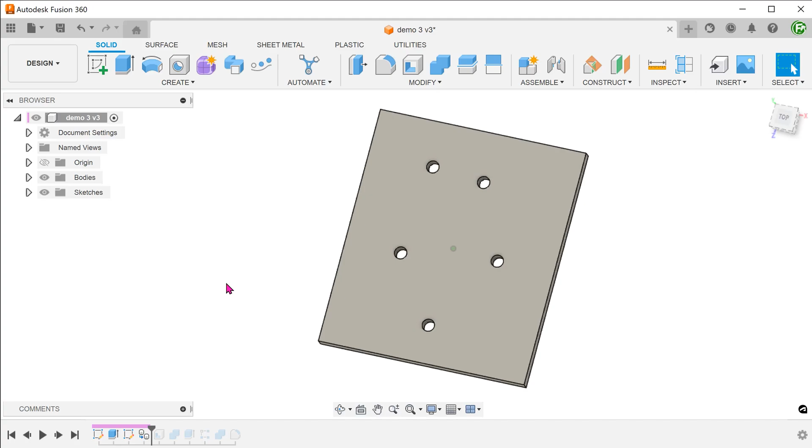We have a plate with a bunch of holes here. The objective is to reduce the amount of material used by cutting slots around the holes.

I think the easiest way would actually be to cut the slots before creating the holes. But I thought it would be an interesting exercise to start from the point where the holes have already been created.

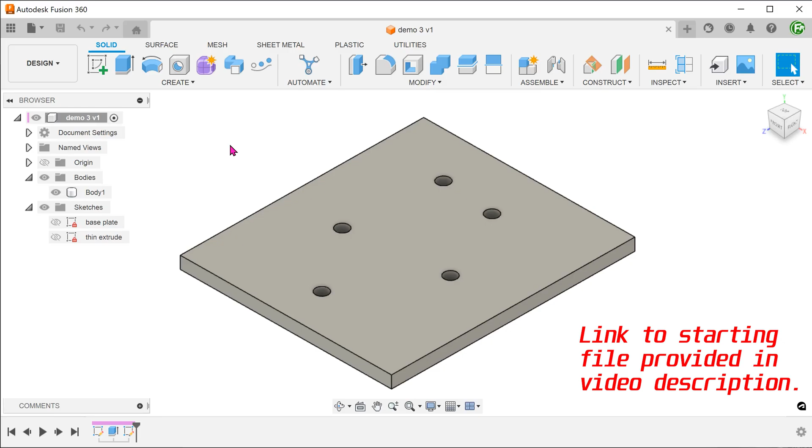First, we need to create a copy of the body. Go to the Bodies folder, select the body, and simply use Ctrl+C and Ctrl+V. Click OK to create a copy in the same place as the original. Rename the copy and hide it for the moment.

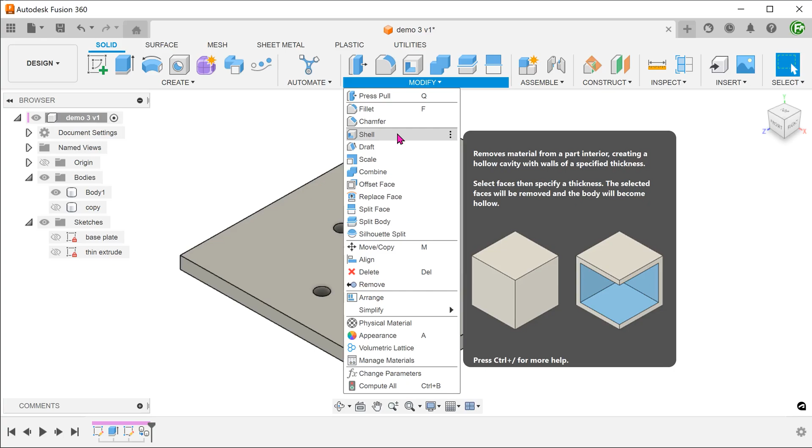We want to remove as much material as possible. Go to Modify, Shell. Select the top and bottom faces, and adjust the thickness. This creates a frame with rings around each hole. This is a minimum material condition.

From here, we want to add material back in. We need to create a body that fills the space between the rings and the frame. Bring back the copy.

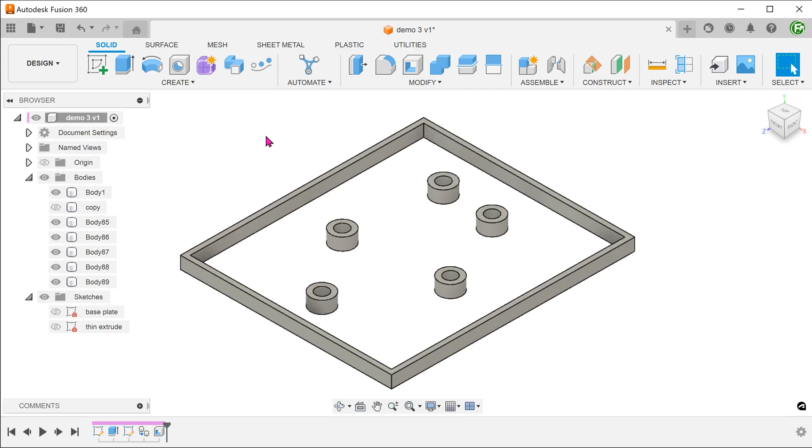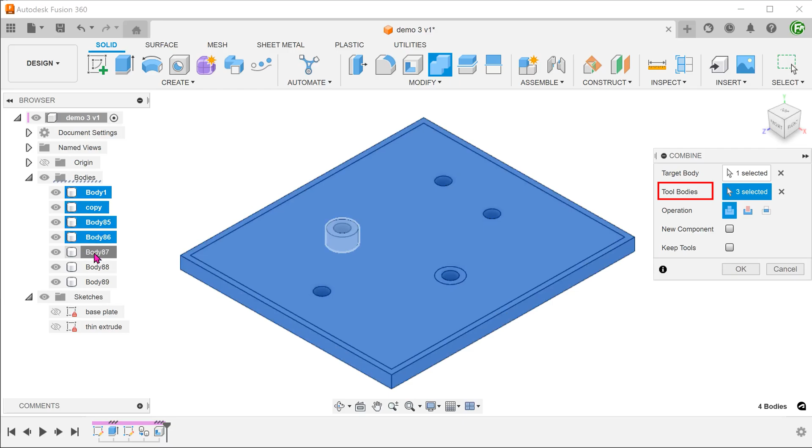Go to Modify, Combine. Select the copy as a target. For tool bodies, select all the other bodies. These bodies will be used to cut into the copy. Change operation to cut. We do want to retain the tool bodies, so check the Keep Tools option.

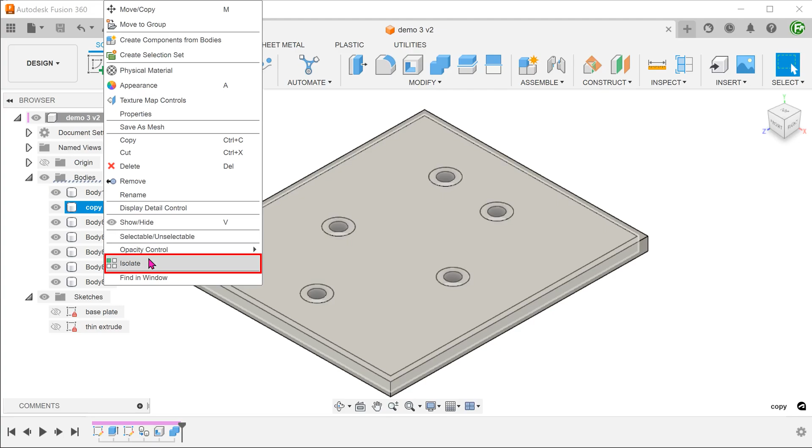Let's isolate the copy and create a sketch on this face.

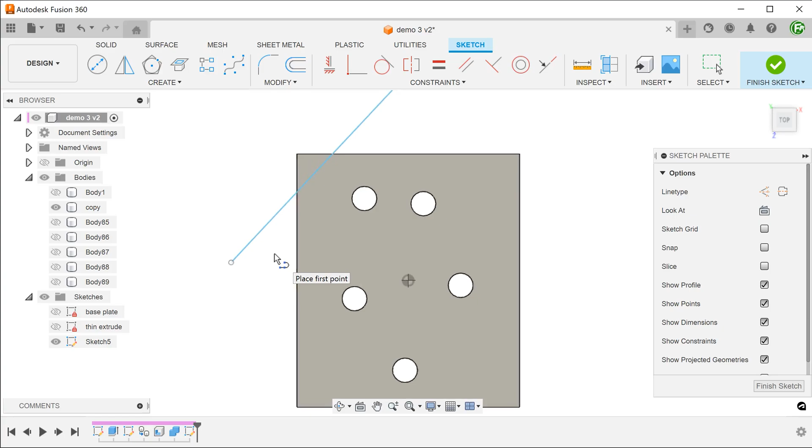Draw a straight line like so. This will serve as a first slotted cut. Snap a line to the midpoint of the first line and make it perpendicular. Set this to construction. This will serve as a patterning direction later.

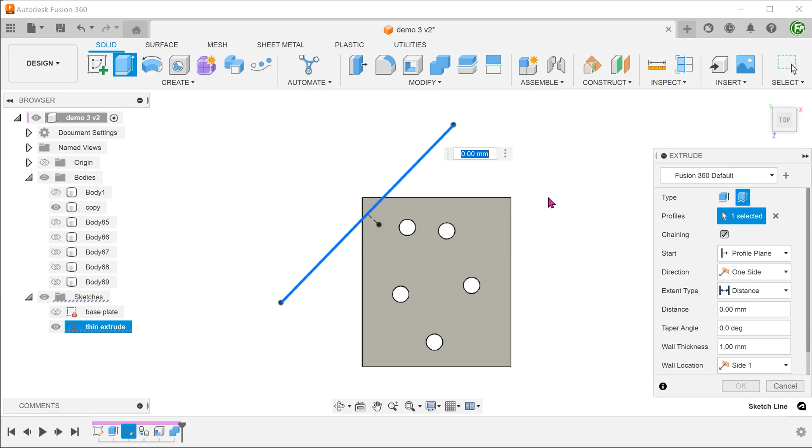Begin the extrude command. Select the Thin Extrude option and select the sketch line as a profile. Adjust the wall thickness. Set wall location to center. We want to cut this through the plate.

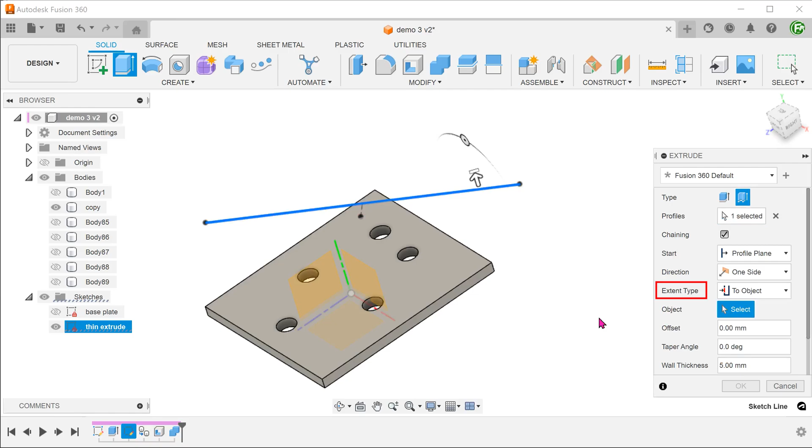We can set extent to object and select the bottom face.

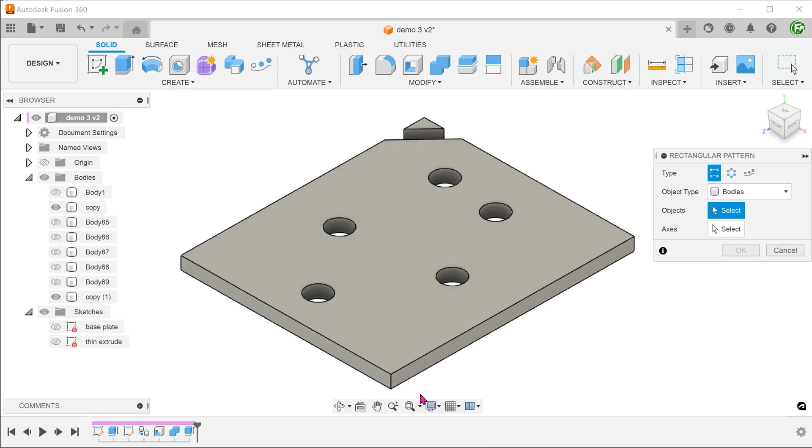Begin a rectangular pattern. Set object type to Features and select the extruded cut.

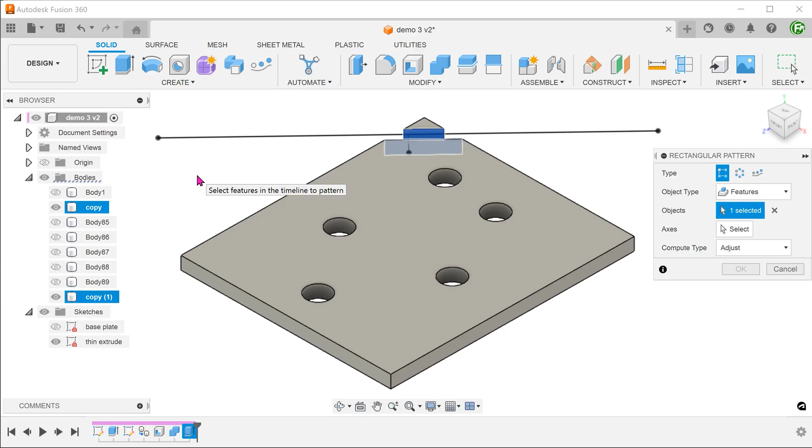Bring back the previous sketch. For axis, click on the select box and select the construction line.

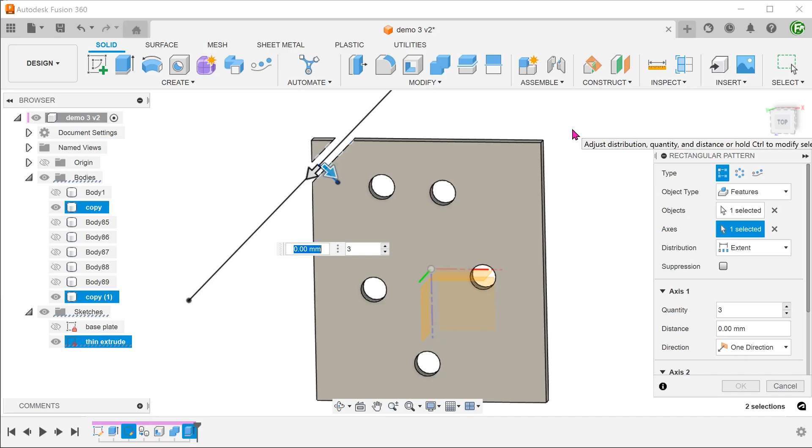Set distribution type to spacing. Adjust the quantity and spacing.

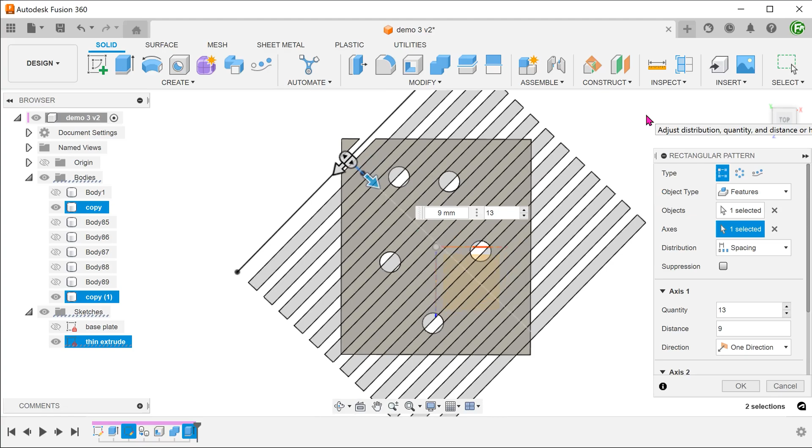From here, we need to combine all bodies. Remember earlier that we isolated the copied body, so there are a bunch of hidden bodies here. We need to bring them back.

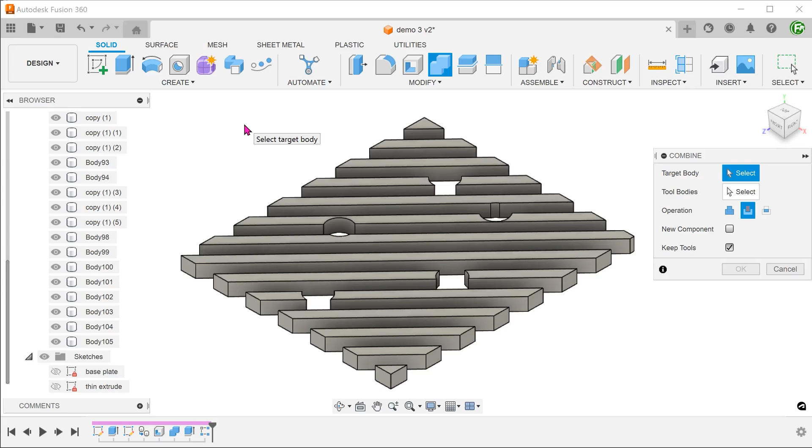Go to Modify, Combine. Go to the Bodies folder and Shift select all bodies. Set operation to join. Remove the Keep Tools option.

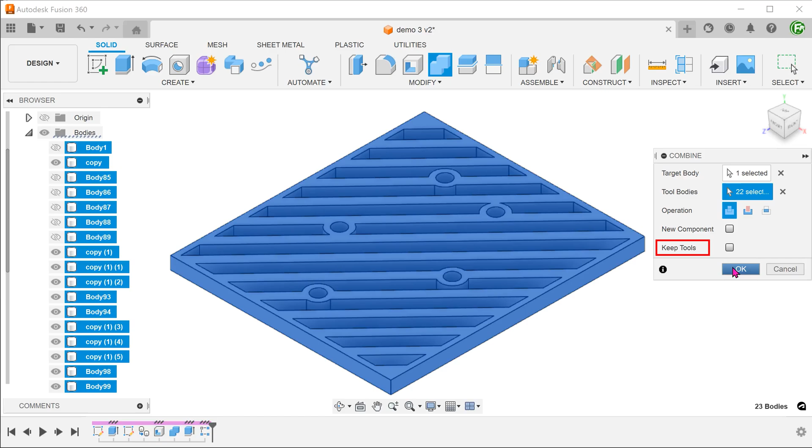When we perform the pattern, it will be quite difficult to align the ribs to the center of each hole. If you find some areas where it is a little bit awkward, you can use the Offset Face command to increase the size of the ring. This is assuming that consistent wall thickness is not important for your use case.

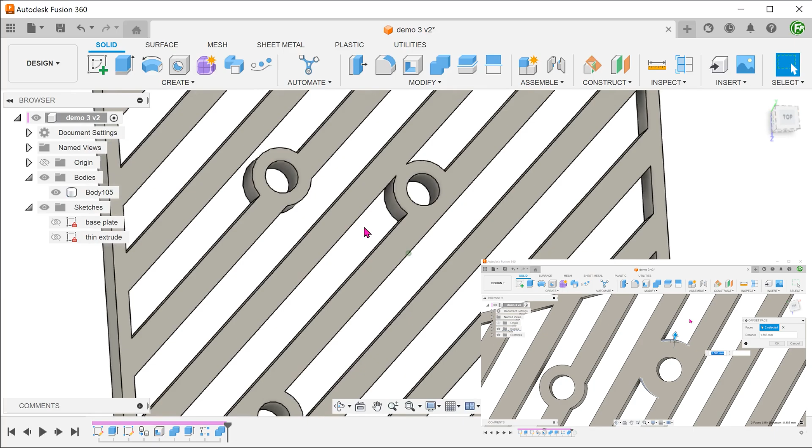Begin the Fillet command. Instead of selecting edges individually, let's use a rule fillet. For rule, select all edges.

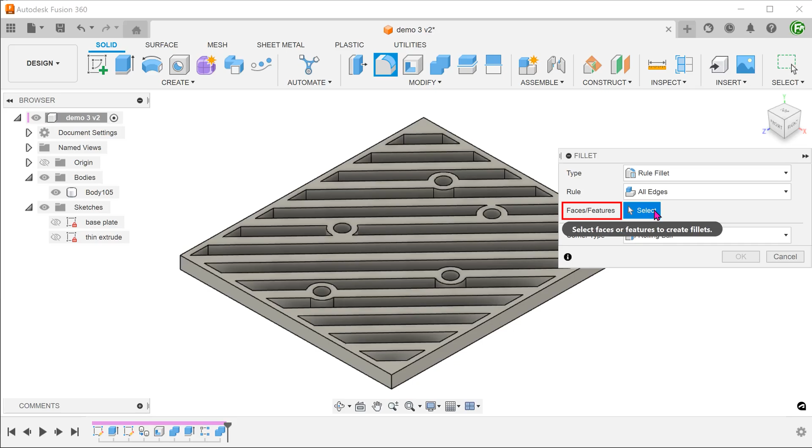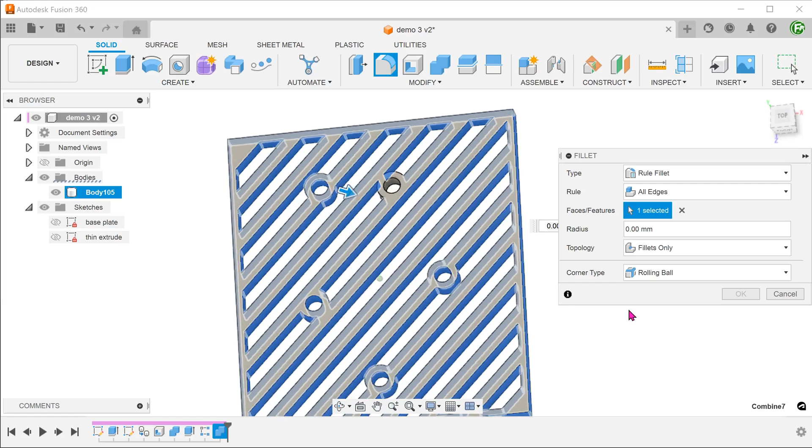The combine feature was the feature that created the edges we need to fillet, so let's select that from the timeline. Since we only want to fillet internal corners, for topology, we should select fillets only. Adjust the radius.